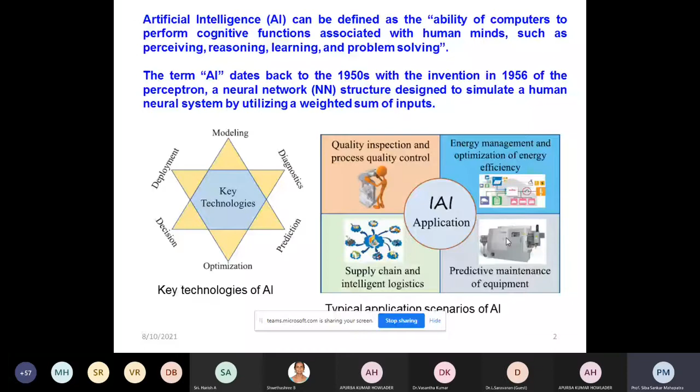Sometimes we call these artificial intelligence automation tools soft computing tools, and we also call them by a broader name, metaheuristics. The thing is that heuristic literally means a computerized thumb rule. Okay, it is simply a computerized thumb rule.

You might have seen in the flow shop scheduling problem, you use Johnson's rule. There is no mathematical background for how it works. But the thing is, it gives some near optimal solution: how to schedule the jobs so that your makespan will be minimum. So that is what we use. So this is a heuristic.

So a heuristic is used without any mathematical background; based on your experience, based on your intuition, you develop some heuristic and apply it somewhere, and if it works, then it is fine, and we call it a heuristic. Now, a heuristic is always problem specific. For a particular problem, a heuristic is developed.

But metaheuristics are used in a broader sense; it is a generalized methodology which can be adapted to any situation or any problem. So one example of a metaheuristic is the genetic algorithm, which is based on Darwin's theory, the survival of the fittest. So that is what we use, and that is a metaheuristic.

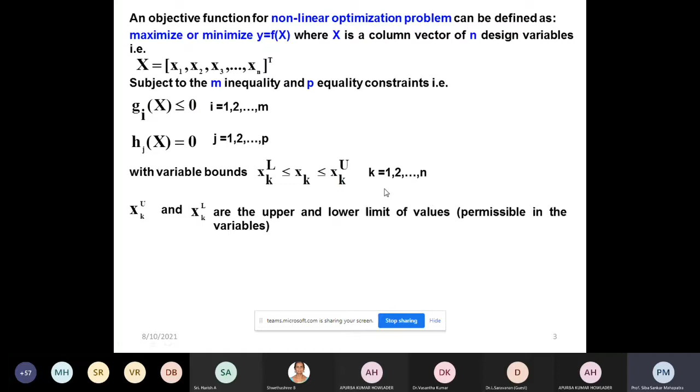So this is a generalized optimization problem. All the variables x1, x2, x3 up to xn will be within the lower limit and the upper limit. This is called variable bounds. In this case, we have only one objective function, f(x).

When you have multiple objective functions, we call it a multi-objective optimization problem. So y will be a vector of objective functions f1(x), f2(x), up to fk(x). In this case, all objective functions may be maximized, or all may be minimized, or some maximized and some minimized. But it is better to solve such problems when you bring all the objective functions to the same level, that is, all maximized or all minimized.

Now, to change a maximization problem into a minimization problem: maximize f(x) is the same as minimize minus f(x). So multiply by -1, and the maximization problem will be converted into a minimization problem, or minimization into maximization. Or you take the reciprocal.

So maximize f(x) is the same as minimize 1/f(x). So that reciprocal also we can use. It is better for solving multi-objective problems, multi-objective optimization problems. If all the functions are of similar nature, it is easy for the solution.

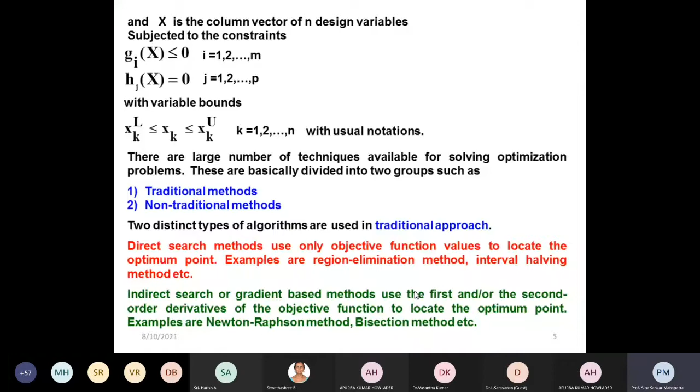So now, when the optimization methods, classical optimization methods, are so rich, then why do you go for the non-traditional methods? Why do you go for the meta-heuristics, which are inspired by nature? Why should we go for that?

Look at a single objective function problem with no constraints, an unconstrained optimization problem, only having one objective function. This is f(x). If you plot f(x), it has only one variable, and our objective is to minimize f(x), so find out the x value so that f(x) will be minimized. It is an unconstrained problem, only one objective function, a single-objective optimization problem.

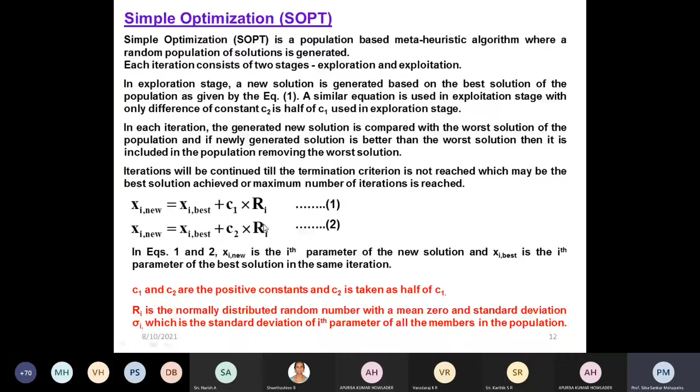So now generating a new solution, we have to use the formula: xi new equal to xi best plus c1 into ri. That is the formula that we will use.

Now here you see that ri is a normally distributed random number, with mean 0 and some standard deviation. So what we have to do is generate the normally distributed random numbers using this formula. So Z1 is a normal variate, that is twice ln R1, where R1 is to the power 1 by 2, sine 2 pi R2. R1 and R2 are uniformly distributed random numbers between 0 to 1.

Now, for generating the normal random variate Z1, either you can use the formula Z1 or Z2. The normally distributed random number Ri will be equal to mu plus sigma Zi, where mu takes the mean 0 plus sigma, that is the standard deviation in the population, and Zi is generated from here. So for this example, let us generate Z1: Z1 is 0.4781, Z2 is 0.4153.

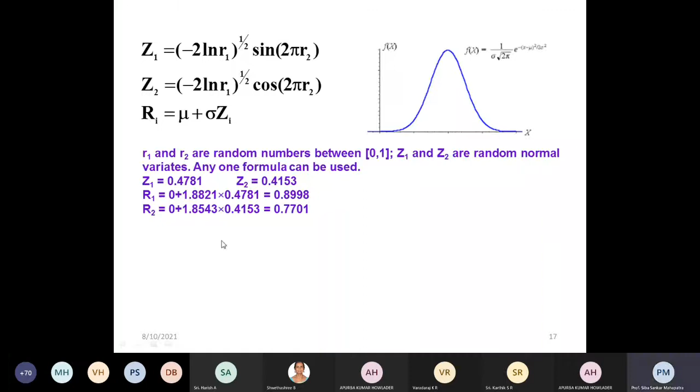So R1, the normally distributed random number generated for changing the x1 value: mu equal to 0 plus sigma 1.8821, multiplied by Z1 that is 0.4781, giving 0.8998. R2 again: 0 plus sigma2 is 1.8543 multiplied by Z2 is 0.4153, giving 0.7701. So two random normally distributed numbers have been generated, one for x1 and another for x2.

Now x1 new will be xi best. What is the xi best? That is minus 0.14. C1 you take as 1.5, then R1 that we calculated, that is 0.8998, so it becomes 1.21.

Similarly for x2, previously it was xi best, x2 best is 0.16, plus C1 is 1.5, then R2 we calculated here is 0.7701, so it is 1.32. Now we put the values of x1 that is 1.21 and x2 1.32 in this formula. We found out that it is 24.9774. So when you get this one, then you remove the worst solution.

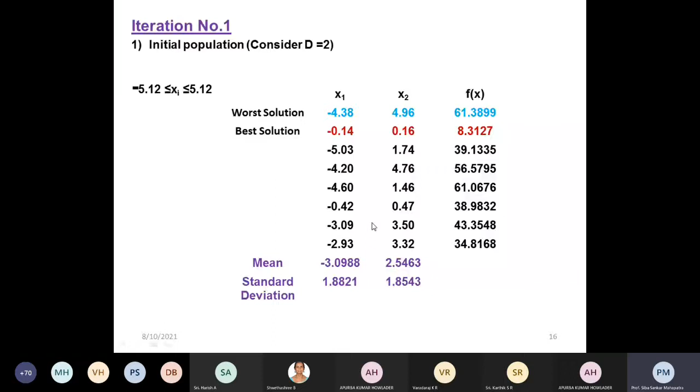The worst solution that we found out is this one: fx in the initial solution was 61.3899. So we will remove that solution and it will be replaced by the new solution, x1 of 1.21, x2 is 1.32, fx is 24.9774. Now once you get the solution, again calculate the mean, then calculate the standard deviation of the solution.

Then calculate Z1, Z2 values, R1, R2 values, then find out the new solutions. Now while finding a new solution, we will use C1 value that we had taken previously as 1.5. Now we take 0.75. Now we find that x1 is 2.20 and x2 is 1.90. We put in the formula, and in the fx value we find 17.2697. Now the worst solution so far will be replaced by the new solution.

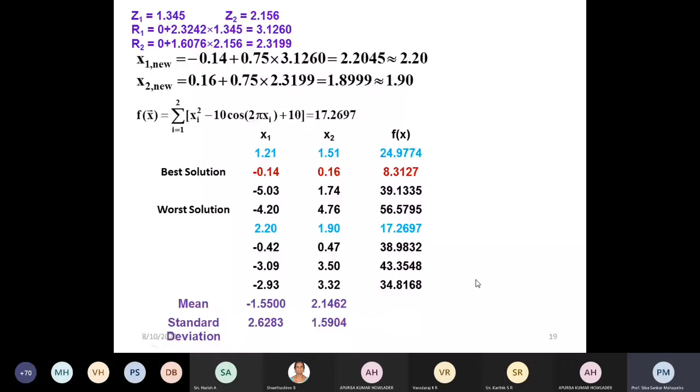So these two steps: in the first step, using C1 equal to 1.5, you got this solution, a list of solutions. Then next, using C2 as 0.75, you got this solution set. Then these two become one iteration. Now this iteration will continue till you get the best solution.

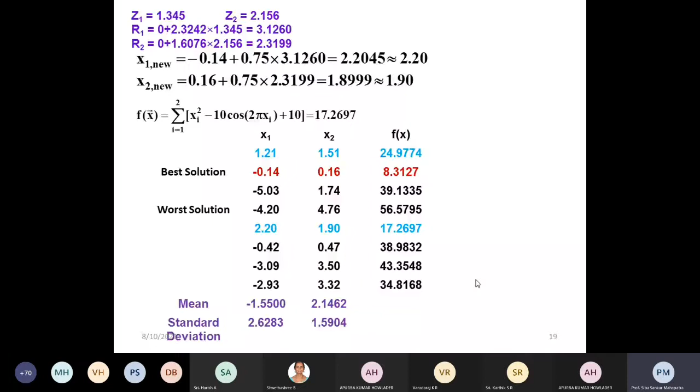Now we have done some research on SOPT. We found whether we should take C1 as 1.5 or not. So we solved many problems, say 25 unconstrained standard problems, and changed the C1 value from 1 to 3. The initial population size we took was 50, and then we tried to solve the problems to find out what should be the best value of C1.

Simple algorithm. Now we solved many unconstrained problems. These are the benchmark problems, 25 problems that we have solved. These are the 25 problems.

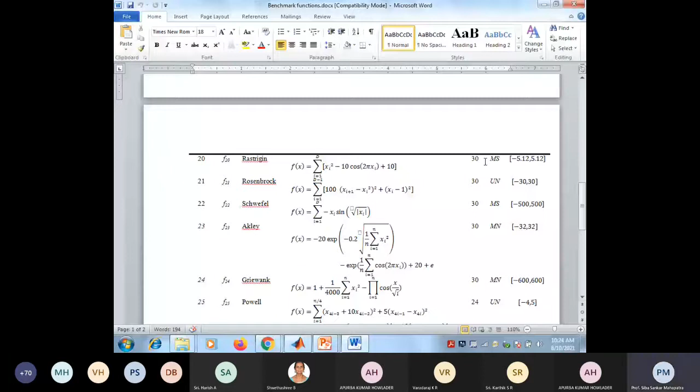Now we solve these problems. Once we solve, this is the result that we have got. This is the actual known solution so far. Then what particle swarm optimization gives as results, and the results given by the simple optimization, the present methodology, and this is the solution given by the teaching learning based optimization algorithm. So we compared with other algorithms and compared with the actual value also.

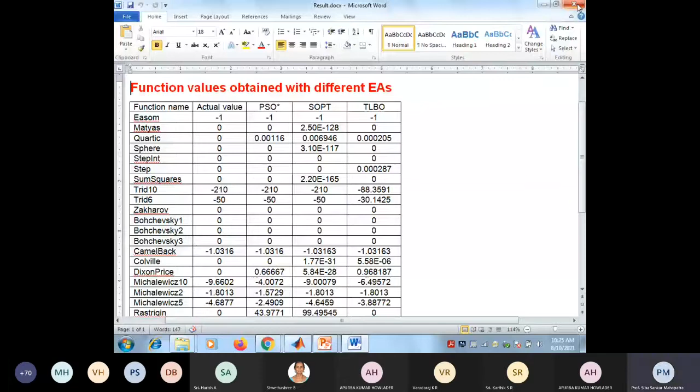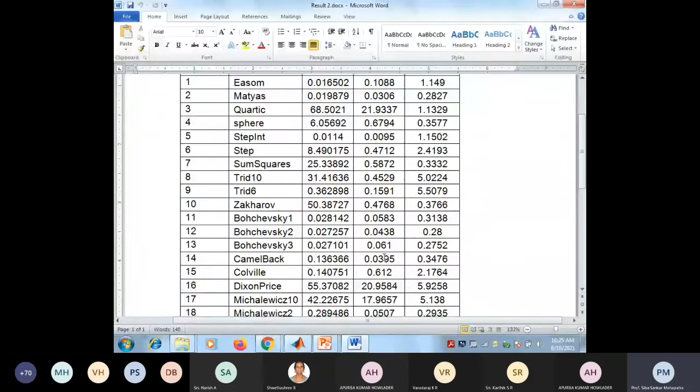After this initial assessment of this algorithm while solving 25 unconstrained problems, we have seen in the results that SOPT algorithm is able to reach best known solution for 21 problems, while TLBO reached best known solutions for 20 problems, and PSO reached best known solution for 15 problems. Interestingly, the Easom and Matyas functions, which are unimodal with flat surfaces, are solved by all the algorithms. But difficulty lies with solutions to functions like Rastrigin, Griewank, Schwefel, and Ackley, which have large dimension and are highly multimodal, and are difficult for all the methods. But the TLBO algorithm is able to get the exact solution for the Rosenbrock function, which no algorithm has achieved so far.

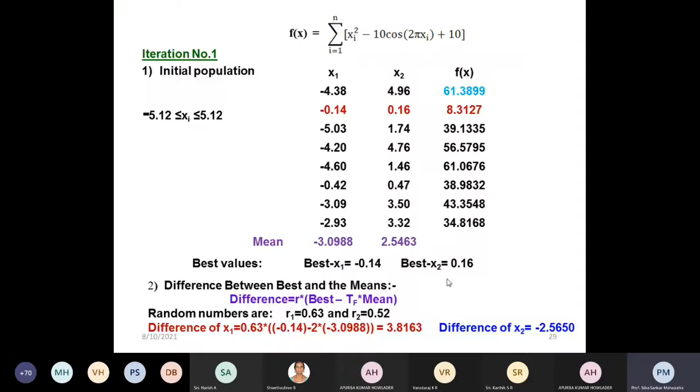And through their interactions, they improve. So the teacher's phase and the student's phase together make one iteration, and we go on solving like this. This is one of the initial solutions. Again, we have taken the Rastrigin function with 2 dimensions only, and we got the solution. Then using the formula given by the algorithm, we can improve in the teacher's phase. So the worst solution will be replaced by the improved solution. This is what happens after the initial solution - the modified solution has been generated.

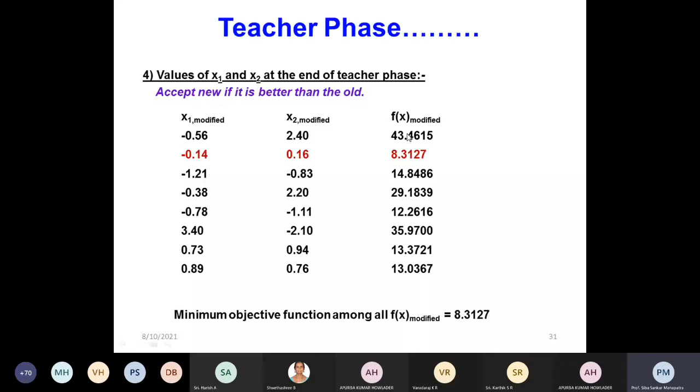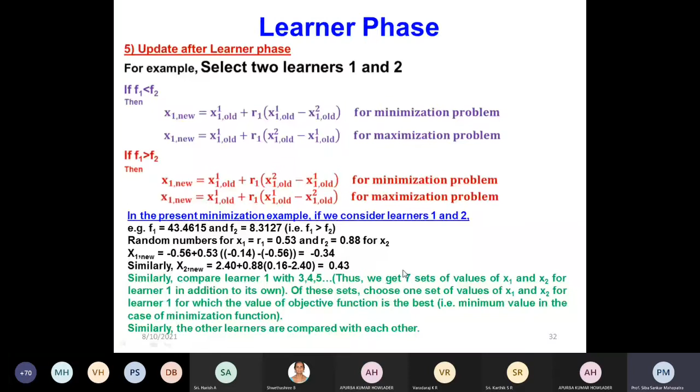Then we come to the learner's phase. In the learner's phase, we compare each solution with the other solutions and try to improve them. Once the teacher's phase and the learner's phase are completed, we get the solution - one iteration is completed. After one iteration in this example problem, we got these types of solutions. So this is how the TLBO works out. Then again, we try to solve that Easom function using MATLAB.

Okay, only thing is, the idea is how can we coordinate and solve different purposes.

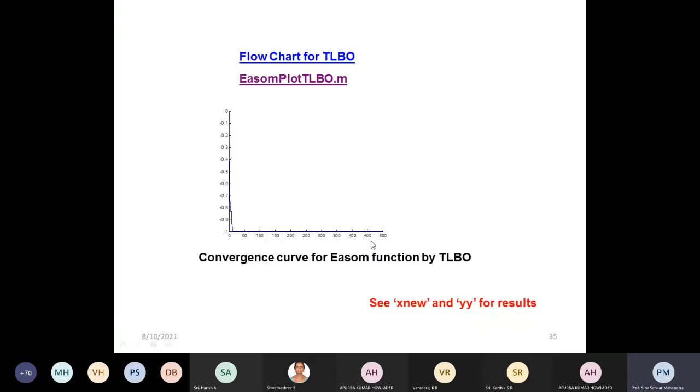Similarly, particle swarm optimization is based on only one equation. Before going to particle swarm optimization, I can tell you that it was based on the behavior of the flocking behavior of birds, or the fish schooling behavior. What they do is, when the birds find a food source, all the birds - a swarm of birds - rush all of a sudden to come to the food source. Now just imagine, suppose birds are sitting on the trunk of a tree.

Now we can define these birds as particles. Each particle is on the trunk of the tree. Then we can define the dimension of the position of the bird, that is x1, x, y, and z - that coordinate we can keep. So when it is sitting on a tree, the position of a bird can be represented by three axes: x1, x2, x3, so the positions you can know. The dimension means the number of variables you are having.

So we are taking the example of a bird sitting in a tree, so three axes you can define. It can be multi-dimensional also. So when there are 5 variables, then we will have x1, x2, x3, x4, x5. So there is a hyperspace having 5 dimensions.

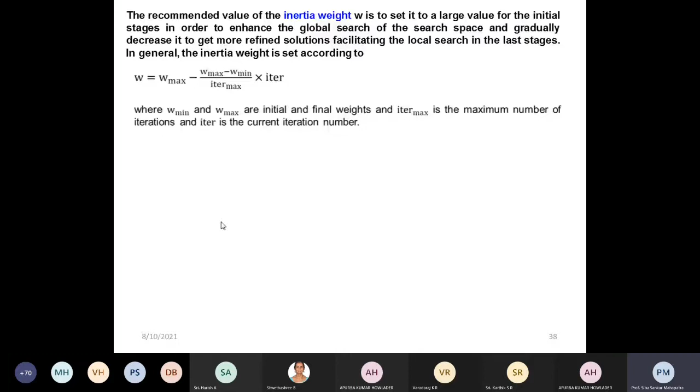Now suppose again we take the Rastrigin function. We have two variables, x1 and x2. Here we have taken c1 equal to c2, the social and cognitive parameters. Then initially generate the position values between x min and x max, that is between 0 and 1. Similarly, generate the velocities between 0 and 1, then find the objective function values. These initial velocity and position values are randomly generated.

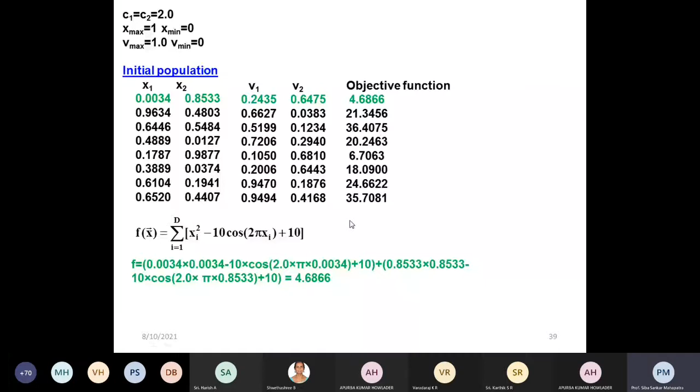When you put the position values x1 and x2 in the objective function, you get the objective function values. So far, x1 is equal to 0.0034, x2 equal to 0.8533, and we get the best minimum f(x) value 4.6866. Next, we update the velocities and the positions, get a new list of solutions, then choose the personal best and the global best, and go on iterating like this. This is the MATLAB code given for particle swarm optimization.

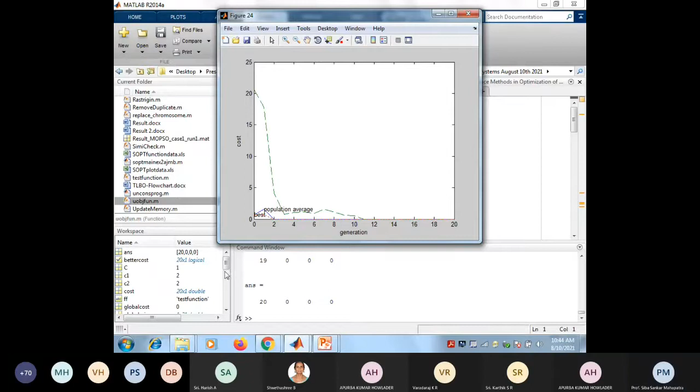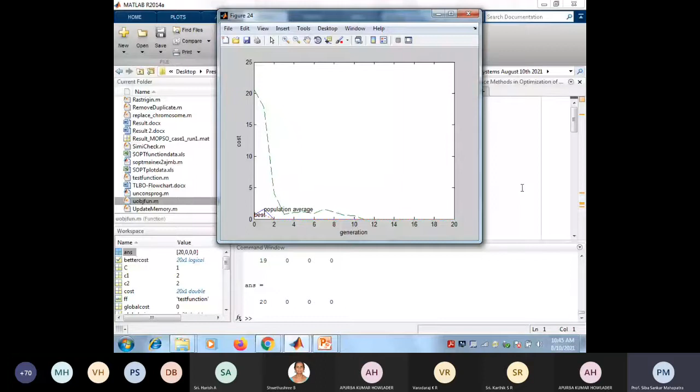Okay. So x1 equal to 0, x2 equal to 0, and f(x) equal to 0. This is the objective convergence plot. So this is the way we can solve. Similarly, many algorithms have been developed.

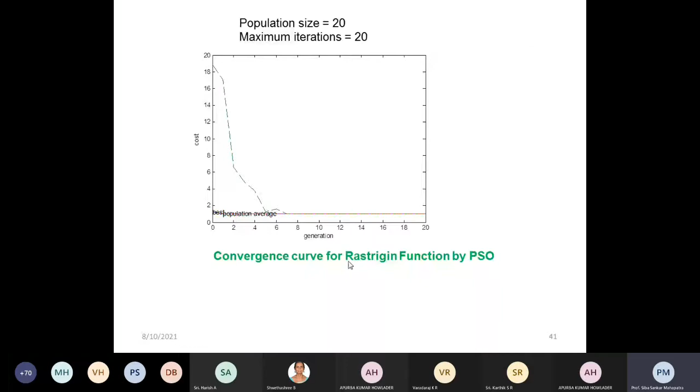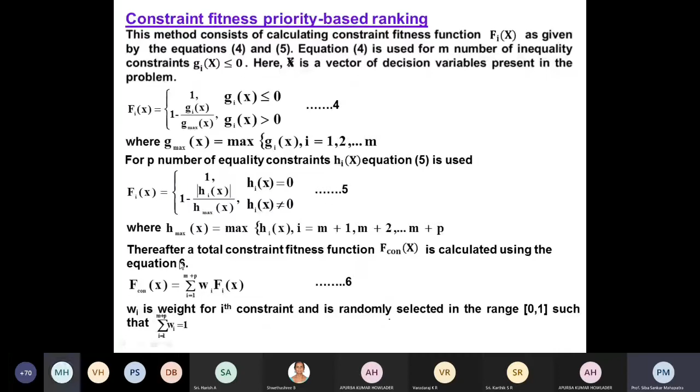Now, very often we face a constrained optimization problem. Constraint handling is really a tricky job. It is really tough. You might have seen the handling of constraints in linear programming problems. Now, the best constraint handling system you can use is the priority-based ranking method. Of course, there are many methods of constraint handling, like repair strategies.

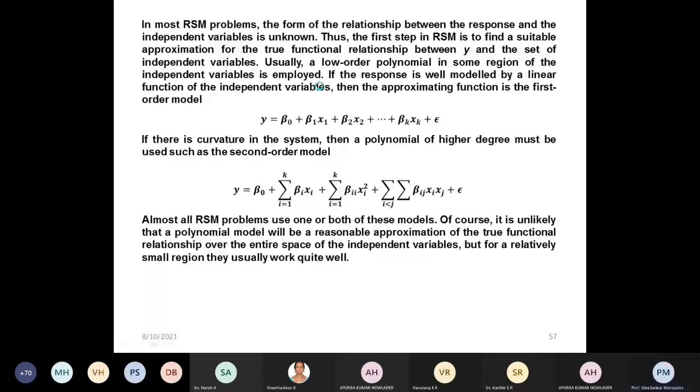The most widely used constraint handling methods are: rejection of solutions violating the constraints, repair of infeasible solutions, applying a penalty to solutions violating the constraints, and applying some rules to rank the available solutions. But I suggest using the priority-based ranking methods. Now let us come to some examples where you can use these optimization techniques in optimizing manufacturing processes.

So for example, in ultrasonic machining processes, what happens? There is a horn where ultrasonic vibration will be there and a slurry will be there. Hard materials can be machined using ultrasonic machining processes. In the USM process, low frequency electrical energy is first converted to a high frequency electrical signal, which is then fed to a transducer. The transducer transforms the high frequency electrical energy into mechanical vibrations, which are then transmitted through an energy focusing device known as the horn or tool.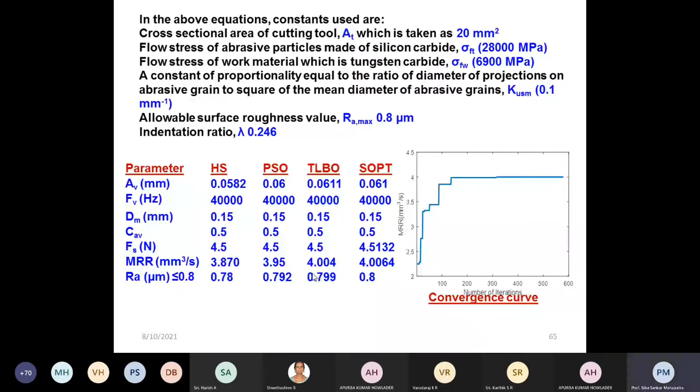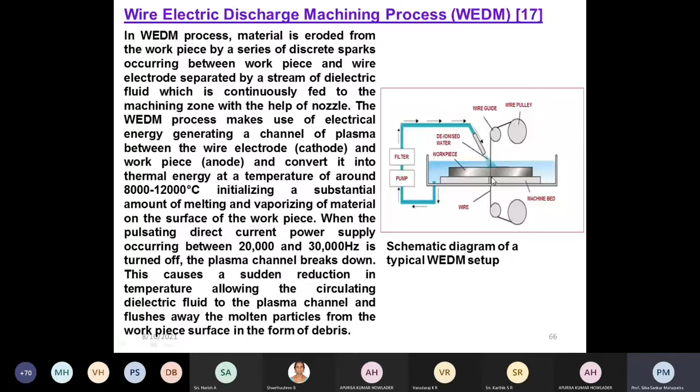Similarly, we come to another type of machining, that is the wire electrical discharge machining process, in which the wire cuts the material by sparking between the workpiece and the wire. This is the schematic diagram of a typical WEDM setup. Here we take 4 variables: pulse on time, pulse off time, peak current, and servo feed setting F. These 4 variables are defined as x1, x2, x3, and x4. x1 is the pulse on time, x2 is the pulse off time, x3 is the peak current, x4 is the servo feed setting.

Now, an analytical solution for machining speed and surface roughness for wire electrical discharge machining has not been developed so far. It is a very complex process. So people use some experiments, preferably the design of experiments approach or response surface methodology.

Then they develop regression models and test whether these are statistically correct or not, based on the coefficient of determination, or whether the residuals are normally distributed. Based on that, they say the regression model is good enough to predict for the future, or that it can be generalized and practically applied. But the regression models basically work fine within that machining environment.

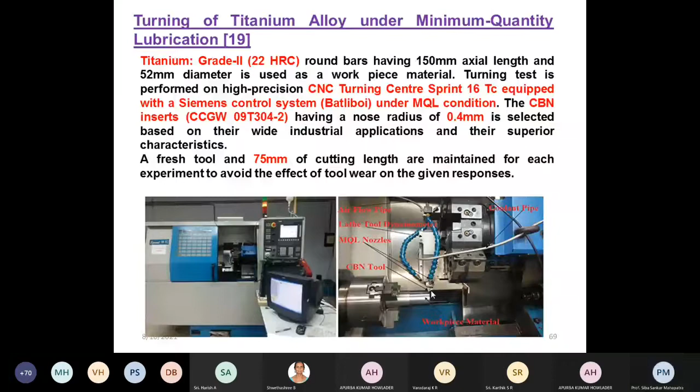Once you use the empirical models and solve with optimization methods, you have to test whether you can confirm the solutions. To do this confirmation, we have taken another example: turning of titanium alloy under MQL, minimum quantity lubrication, condition. Here the experiments were conducted using response surface methodology based on the Box-Behnken method.

The variables are cutting speed, feed, and approach angle of the tool. The responses are cutting force, flank wear of the tool, and surface roughness. Using these data, regression or empirical models for cutting force, flank wear, and surface roughness were developed. Then PSO is used to solve the problem, with a weighted function of these responses.

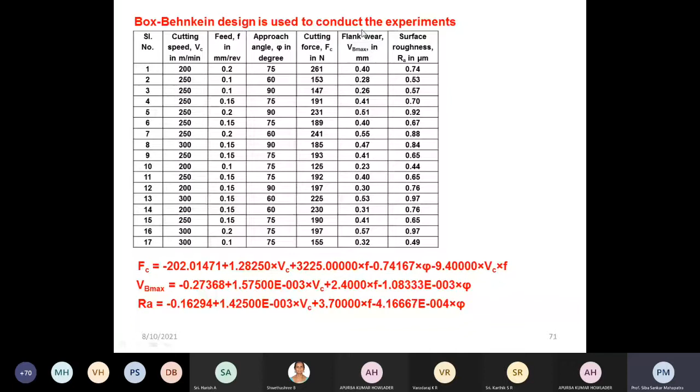Using particle swarm optimization, we get the cutting force, flank wear, and surface roughness, and the variables. Then it has been tested again experimentally under this parametric condition, checking whether we get the optimal cutting force, flank wear, and surface roughness. So the cutting was made under MQL condition.

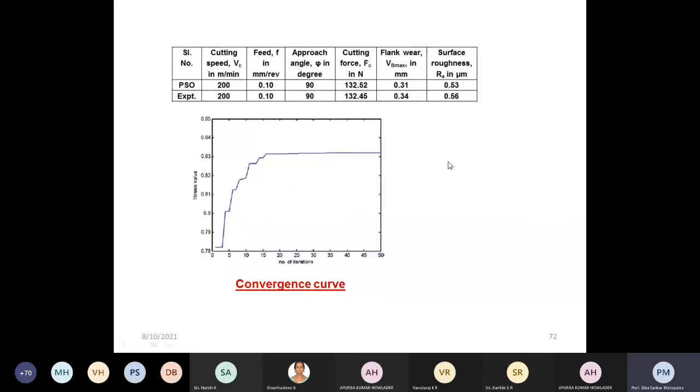Then come to another type of automation where we have used additive manufacturing, that is the fused deposition modeling method, and we are interested to improve the compressive strength of the FDM, fused deposition modeling, built parts. So for that, experiments have been conducted.

Here we have taken the FDM parameters, that is the layer thickness, sample orientation, raster angle, raster width, and the air gap, and the experiments have been conducted as per response surface methodology, and it is a face-centered central composite design, and the levels for each parameter have been taken.

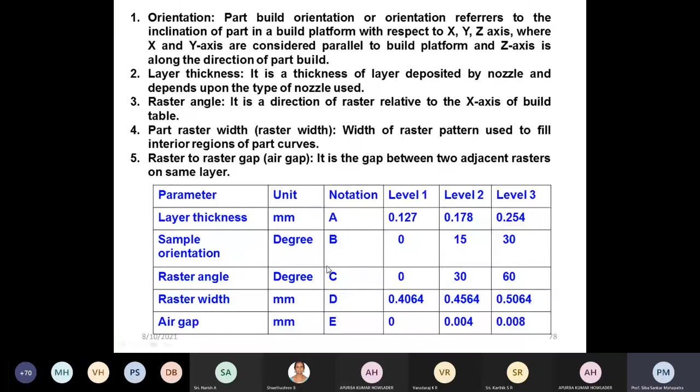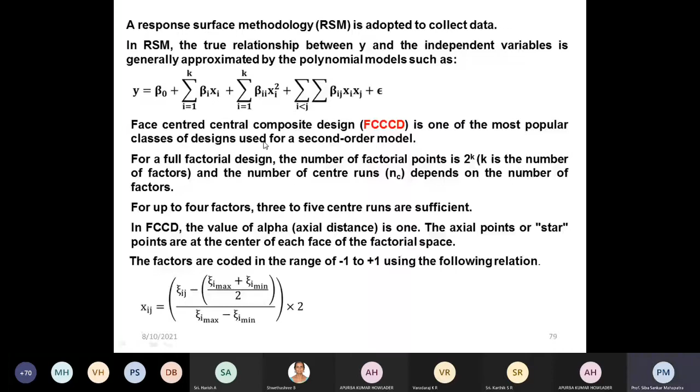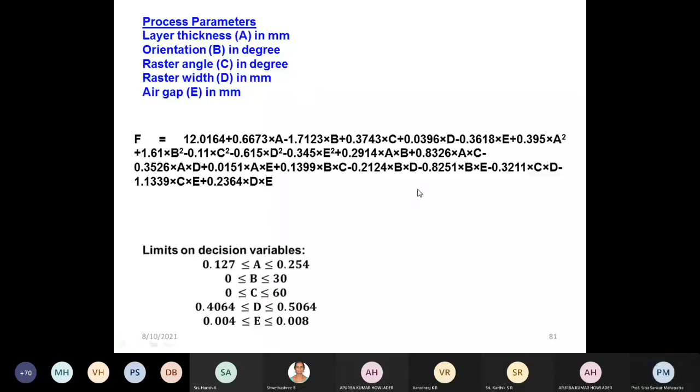Then using this experimental data, an empirical model has been developed. Then that empirical model has been solved or optimized using particle swarm optimization.

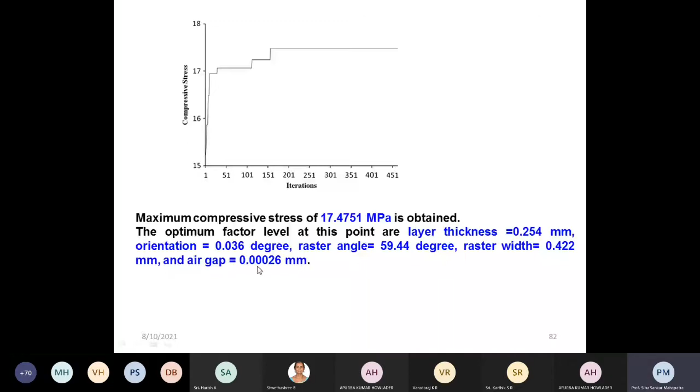Now maximum compressive strength that we got is 17.4751, and for that layer thickness is 0.254, orientation is 0.036, raster angle is 59.44, raster width is 0.422, air gap is 0.00026. Now this is the solution that we have got, and here the part is built using ABS plastic. ABS basically stands for acrylonitrile butadiene styrene.

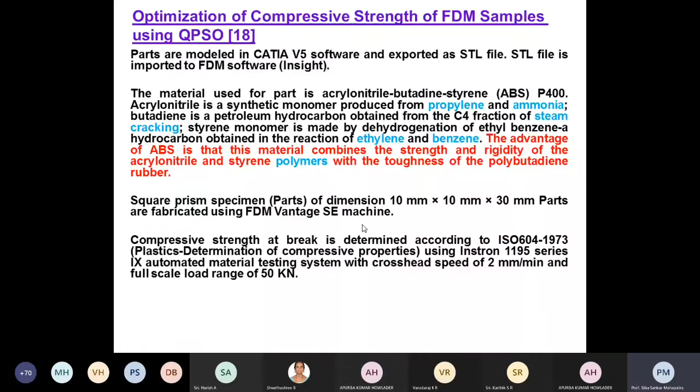Compressive strength test is carried out as per ISO 604-1973 standard, using an Instron 1195 series machine, and parts were built using the Vantage SE machine supplied by Stratasys Incorporation. So similarly, we can go for abrasive jet machining.

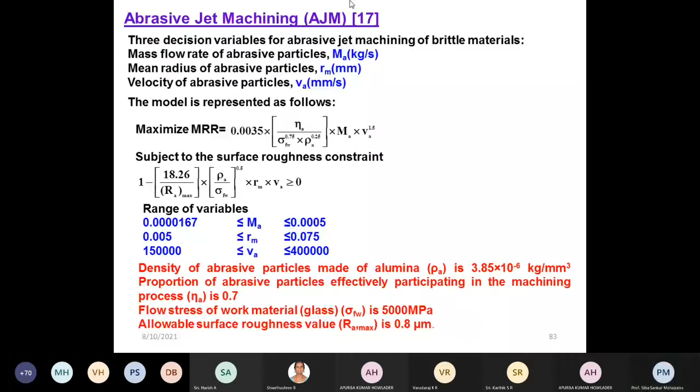In abrasive jet machining, the solutions that we have got, the analytical equations that we are having. So then you see that SOPT is a good solution, whereas TLBO violates the surface roughness constraint.

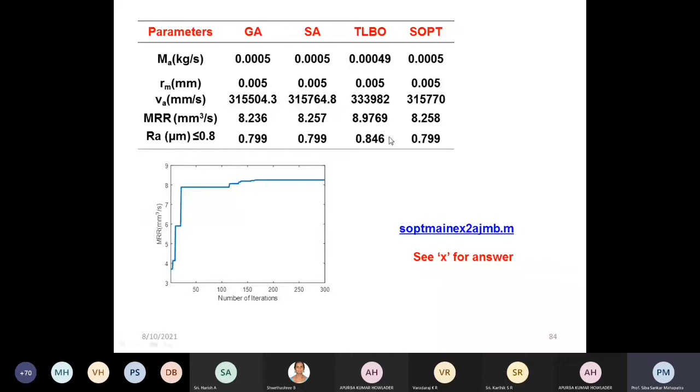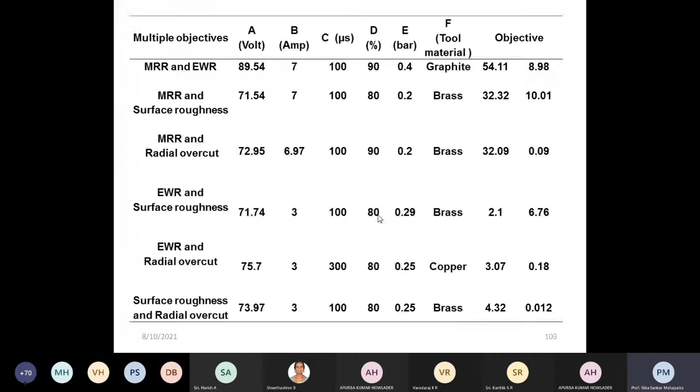Okay, so many optimization examples that I am having, even multi-objective functions, a lot of examples. So it is very difficult to narrate or discuss all the issues. But the main thing is what you find when you use optimization of machining or manufacturing processes. It is really difficult to get the objective function.

So try to get the objective function using numerical methods or analytical solution methods or empirical methods. We should have a good objective function. When you use the response surface methodology, empirical methods you develop, the only problem is that it is limited within that experimental zone.

But when you use the numerical solution using ANSYS or whatever solutions we can use, sometimes it is not practicable because we make a lot of assumptions. Similarly, with the analytical solutions, we make a lot of assumptions to make the solutions tractable, and that is the difficulty. But still, people try to develop numerical solutions